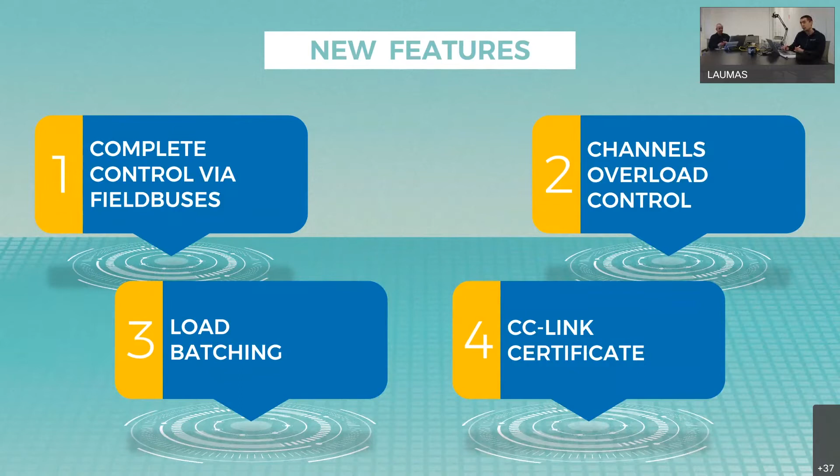So now we can start with the first new feature that we consider the most important offered by this firmware version, specifically the complete control via fieldbuses of the instrument. Independently of the communication interface you will use in your applications or products, exploiting this function, you will be able to obtain a complete control of the instrument by remote.

What does it mean? First, you will be able to obtain the full access to all the parameters composing the instrument configuration. This means to be able to access and modify the parameters regarding the theoretical calibration or the parameters regarding the setup of the digital filter applied by the instrument on the calculated weight values.

Again, you will be able to access the parameters needed to set up the zeroing functions or the digital inputs and outputs functioning, as you will be able to properly set up by remote all the advanced diagnostic functionalities offered by the multi-channel weight transmitters due to their multi-channel architecture.

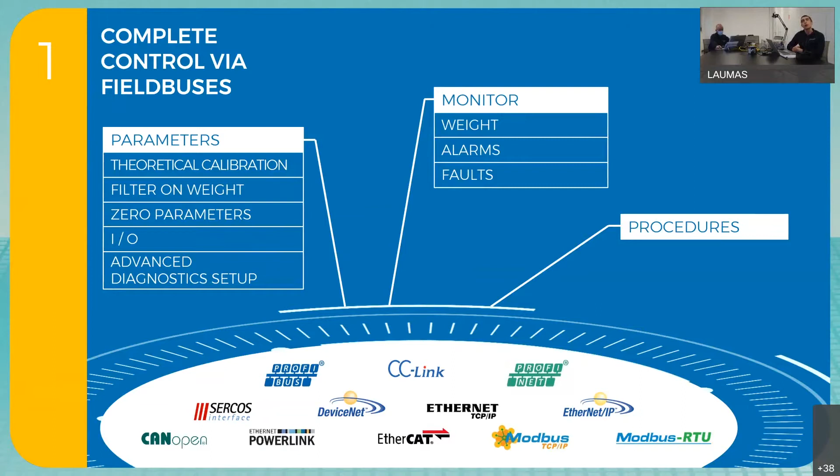Again, during your weighing system's functioning, the complete control will allow you to not only retrieve the calculated weight, but you will be able also to get more detailed information about alarms or faults detected by the instrument itself, also depending on its configuration.

And finally, the complete control feature will allow you to implement in your application a full access to all the procedures needed for the installation and the setup of your weighing systems. This means to be able to execute by remote not only a real calibration with sample weight procedure or zeros or tares, but also, for example, you will be able to access and execute by remote a digital equalization.

A last observation about this feature: the development of this function has been realized without any modification to both the structure of the data exchanged by the instruments on the different communication interfaces and the descriptive files associated to the different fieldbus interfaces, except for the CC-Link interface, for a reason we will see shortly in this presentation.

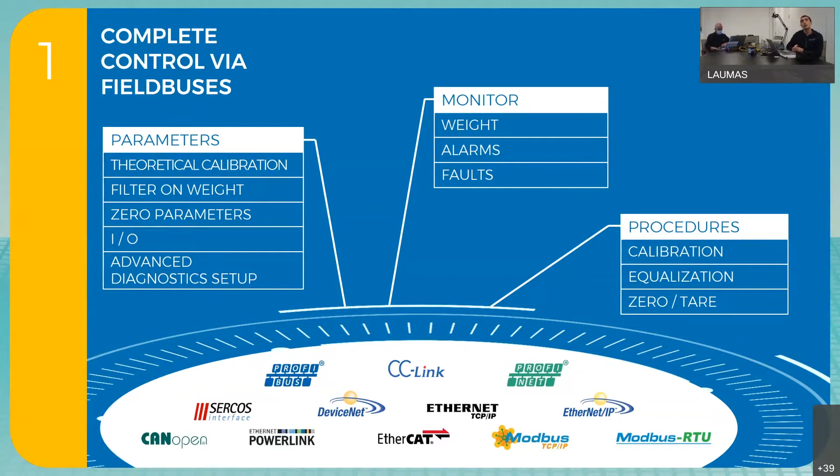Well, now we can change the topic of our discussion. Now we will speak about diagnostics. In fact, in this firmware version, a new diagnostic functionality is available. More in detail, a channels overload control function will be available.

Enabling this function on a multi-channel transmitter, associating it to one of the available digital outputs, and after setting a proper weight threshold, the instrument will start to continuously monitor the load distribution on the scale among all the active input channels. And if at least one of the monitored load components results to be above the previously set weight threshold, a specific alarm condition will be signaled by the instrument, closing the associated digital outputs.

Where could this function be useful? In our opinion, it could be very helpful in lifting applications, for example, in order to allow you to implement monitoring functionalities able to detect a not correctly loaded platform. So a platform working in conditions that could cause damage to, for example, the mechanical structure or an incorrect functioning of the whole application.

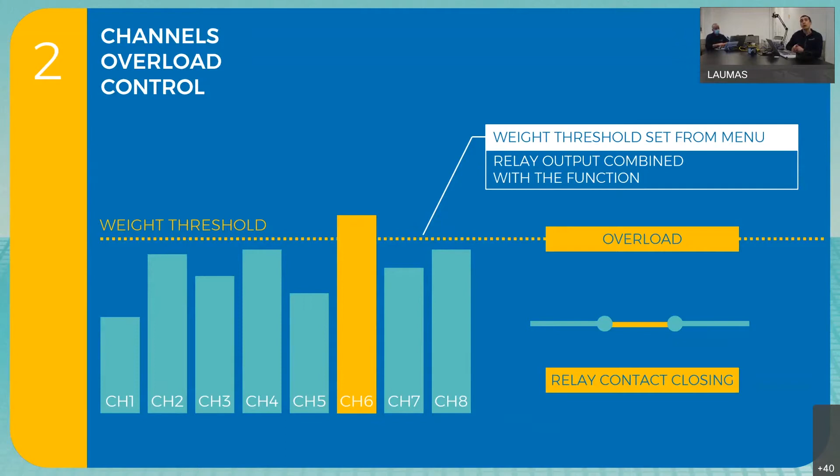Now we change the topic again. Now we will speak about available programs. With this firmware version, in fact, a new program is available on all our multi-channel transmitters. Namely, a batching program is available that you could exploit to realize single product load batching applications.

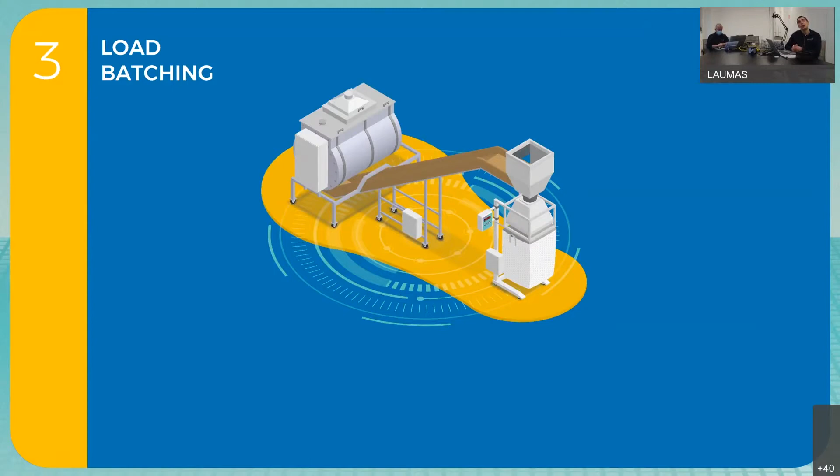Which are the main characteristics of this program? First, you will have available one batching formula composed of two weight thresholds. This means being able to implement applications executing two-speed batchings. The formula can be programmed both from the instrument manually and by remote.

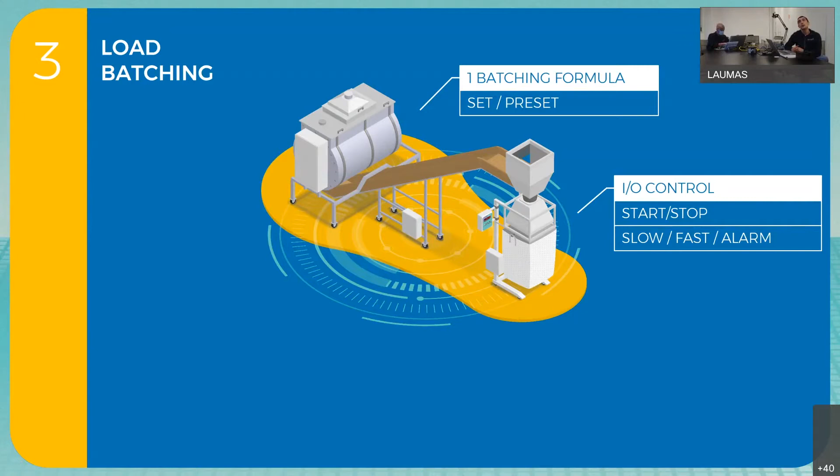Again, exploiting this program, you will be able to interface the multi-channel weight transmitter to some of the components of your application, delegating to it their management using the set of digital inputs and outputs available on the transmitter itself.

Then, a set of specific functionalities are available to optimize the performance of your batching application in terms of both batching speed and batching accuracy. We are referring to the fall function, automatic or manual, the tapping function, and the slow function.

With this batching program, a tolerance function is also available. Using this function, you will be able to implement a specific control executed directly by the instrument on the batched quantities.

After defining a specific weight limit, it will be used by the instrument at the end of each executed batching cycle to control the batched quantity, and if a batched quantity turns out to be outside this limit, a specific alarm condition will be signaled by the instrument.

And finally, the batching program makes it possible to delegate consumption management to the instrument. The instrument, enabling this function, will be able to automatically manage and update the product quantity used by the batching application, updating it at the end of each executed cycle with the real batched quantity of the product.

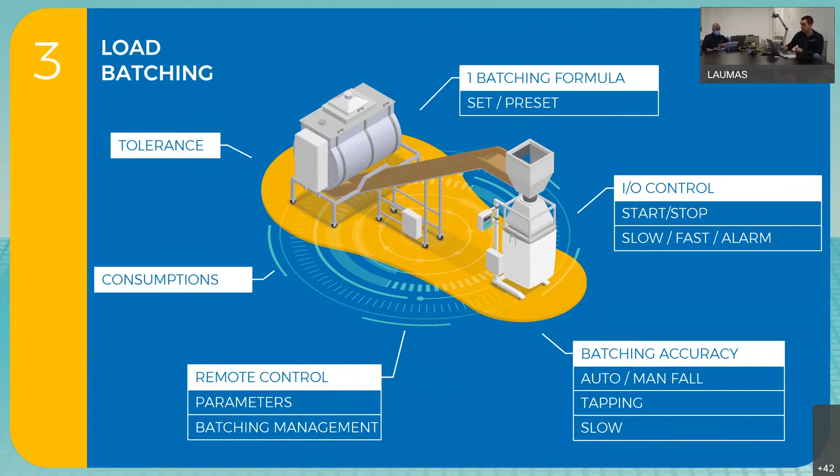And a last topic regarding specifically our CC-Link models. As I told in the first slide of this presentation, the CC-Link interface has been changed in this last firmware version in terms of both the structure of the data exchanged by the instrument on the fieldbus and the associated descriptive files. The reason is that in the last months, LAUMAS went through, with the TLB4 and TLM8 CC-Link instruments, the certification procedure executed by the CLPA consortium.

The procedure was successfully completed last October, and having a certified interface means that these instruments have been verified to be fully compliant with a set of technical standards created, defined and maintained directly by the CLPA. The compliance to these standards means that these instruments can be installed in any CC-Link network without the risk of creating issues with the network's correct functioning or compatibility issues with other CC-Link devices simultaneously installed in the same network.

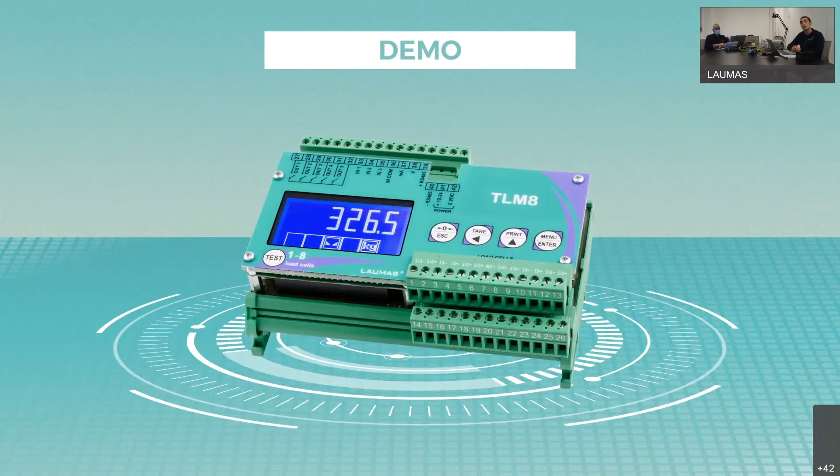Well, this is the last slide of our short introduction. Now we can switch to our demonstration, where we will see together some of these new functionalities directly at work on a real weighing system. So give me only a few seconds to switch off the PowerPoint presentation.

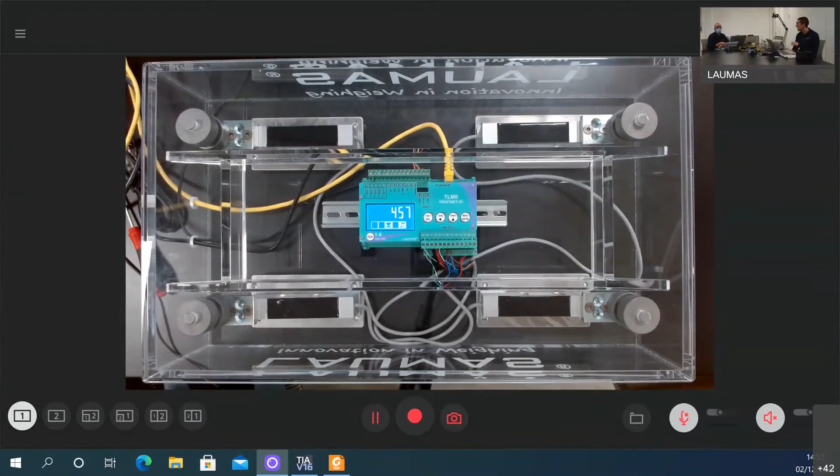Now, on your screens, you should be able to see in the lower left corner a webcam image of the scale we will use. We can zoom on it a moment. As you should be able to see, this scale is composed of four 30 kilogram load cells connected to one TLM8 Profinet IO multi-channel weight transmitter, already communicating with an S7-1200 Siemens PLC.

Then, always on your screen, you should be able to see on the left the TIA Portal interface, showing you a table of variables we will use for our demonstration.

And on the right, our TLM8 communication protocols that we think to be the main technical reference in terms of documentation you should strictly follow when you plan to implement functionalities regarding the remote control of our multi-channel transmitters, and in order to correctly exploit all the new features we are showing to you today.

So before starting to work on our real system, a few words about how to manage this document. First, in the introduction, a specific table is present and it gives us a very important information because depending on the communication interface we are going to use in our system, it gives us the reference we should follow on all the other paragraphs of the document to find the right instructions needed to correctly execute all the procedures allowed by the remote control functionality. For example, in this case, we will use the Profinet IO interface, and this table says to us to follow the generic interface references in all the paragraphs of the document.

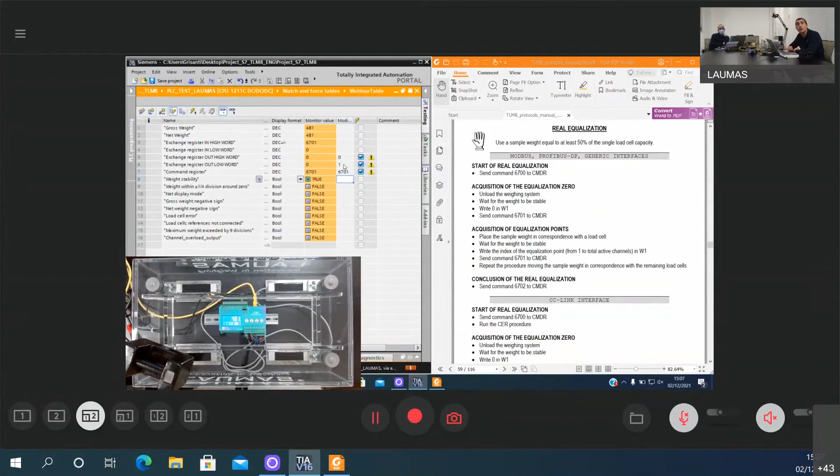And if correctly executed, we can start a cycle composed of a number of steps equal to the load cells installed on our system. In this case, we have to execute 4 steps, and for each step we have to place the weight that we will use on one of the load cells, and follow our instructions that say to write the index of our cycle step in the exchange register and the 6701 command code in the command register. And we send the data to the instrument. The feedback says to us that the step has been correctly executed, so we can proceed.

We should now move the weight to another load cell and send to the instrument the same command, but with an increased value for the index. But now I send the data without moving the weight to a different load cell, and we receive an error signaling in the exchange register as feedback for the command execution. We can see in the corresponding table what the signaling received means. Here, the table.

The -3 value in the high word corresponds to an execution error, and the 9 code in the low word corresponds to: the current load cell has already been equalized. So we are able to correct our procedure, and we can try to repeat the step, this time placing the weight in the right place. So we can move the weight, then we have to wait for the weight stability, and we can proceed with the equalization step.

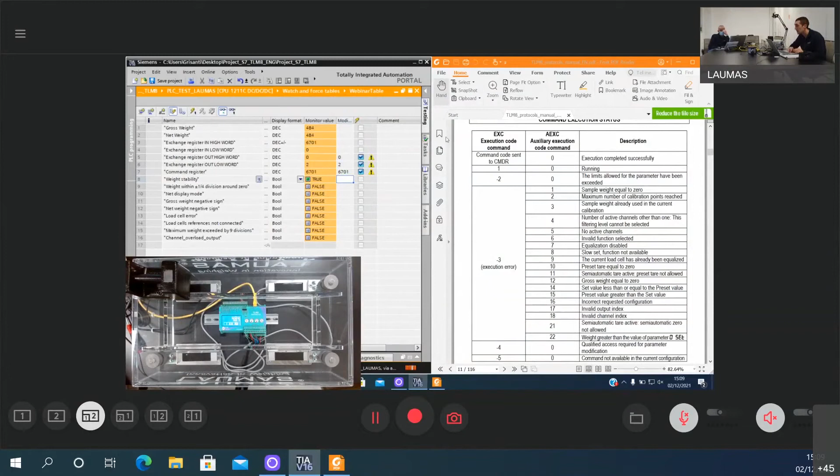Okay, this time it has been correctly executed, and we can go on with the other steps. This is the third step, so the index is 3. Okay, and the fourth step.

Okay. When the cycle is completed, we can execute the last step of the procedure, this one, sending the 6702 command code to the instrument. Okay.

Now we can zero the scale again, because the coefficients calculated by the equalization can cause a little change in the calculated weight. And we can now test our scale functioning, placing the same weight on a different point of our platform, and we can easily verify that now the calculated weight is uniform on all the scale surface.

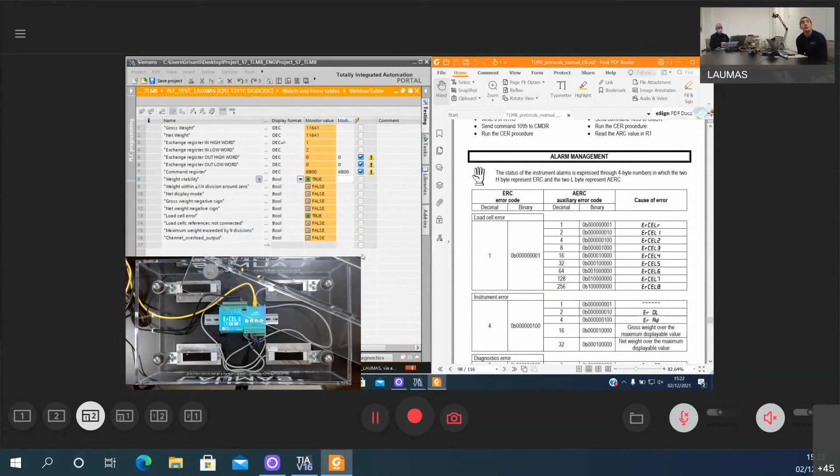Obviously, we hope this feature will make it possible for you to implement more detailed diagnostic functionalities on your application, allowing, for example, your final user to get correct signaling on a specific error condition without the need to access the electric cabinet where our instruments will be installed.

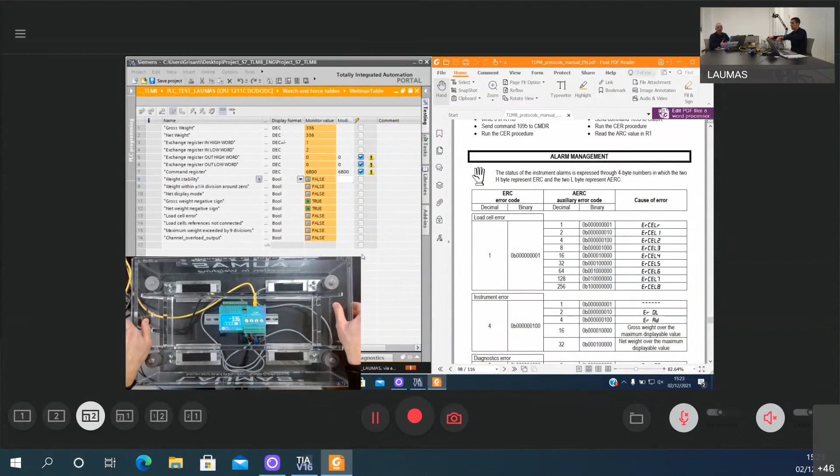Okay, this is the last test for our demonstration. So it is concluded, and I can now give the floor to my colleague Pietro, who will lead the final section of the webinar, the question and answer time. So please, Pietro. Okay. So, thank you very much, Matteo. I think this introduction was really useful because we have seen a lot of new features and functionalities that initially were available just on the transmitter, and that now you can remote completely to your PLC, so it can simplify your life and make your system more advanced, let's say.

We can now start checking your questions. We have the first one that came almost in the beginning of the presentation, Matteo. Okay. And the question is from Mr. Javier, who's asking, to make the remote adjustment, do we need software or just the IP address? I think he means the remote setting and calibration.

Okay, obviously it depends on the communication interface the user wants to use. In case of, for example, Profinet IO, the IP address is usually automatically assigned by the PLC, at least in case of Siemens PLCs, once the network is put to work by the PLC itself. So to assign the IP address to the instrument, you should work on the PLC project in a specific view of the development software. For other communication interfaces, we have the IP address among the values accessible by menu. So in that case, you should set the IP address before starting the communication with the instrument.

Okay, thank you very much, Matteo. If the fieldbus is TCP/IP, can we use Instrument Manager over TCP/IP instead of RS485? My case is TLB4. Yes, it's clear. No, actually no. With the current version available of Instrument Manager, you are able to interface to the instrument with a serial connection only. Obviously, we are working on new developments for Instrument Manager, and we already take into account the TCP/IP connection as a way to connect to the instruments, but we are reasoning to offer this opportunity maybe on new instruments and not on the current models available for you.

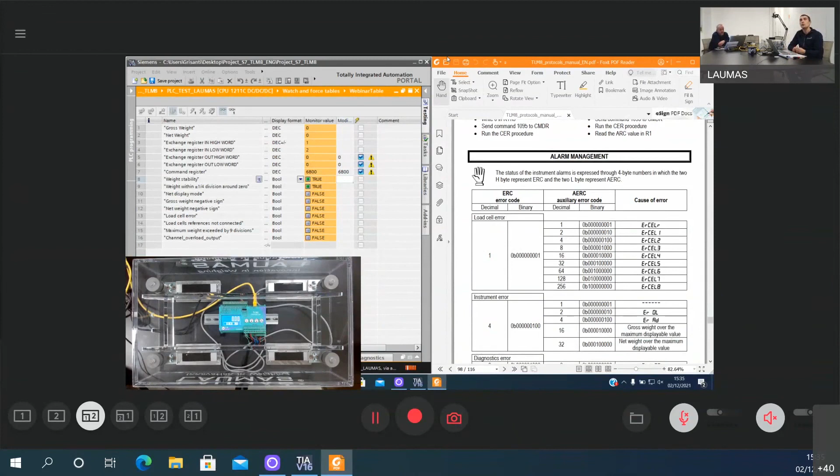We have a question from Mateus that's asking, I wonder if multiple channel transmitters could be used to monitor two different scales, one load cell each at the same time. Yes, but only in our current firmware version and instrument architecture, exploiting the raw point functionality. So you are able to manage a similar weighing system, but from the instrument you will be able to get the ADC raw points only, and you should develop a specific software able to filter the obtained values and to use them to calibrate your system and obtain a real weight value for each scale connected to the instrument.